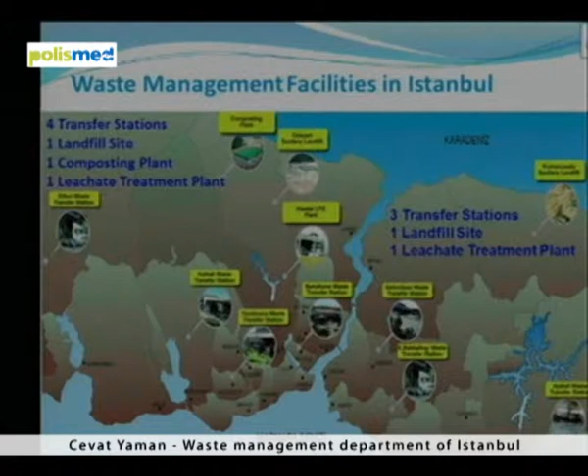And since the topic of my presentation is waste management, there is 14,500 tons of waste per day produced in Istanbul. In the slide, you see the locations of waste management facilities in Istanbul. There are two landfills. One is in the European side, and the other one is in the Asian side. And there are two leachate treatment plants along with these landfills. And we have also one composting plant on the European side. And we have 7 transfer stations, which bring the waste from the towns to the transfer stations and from the transfer stations to the landfill sites.

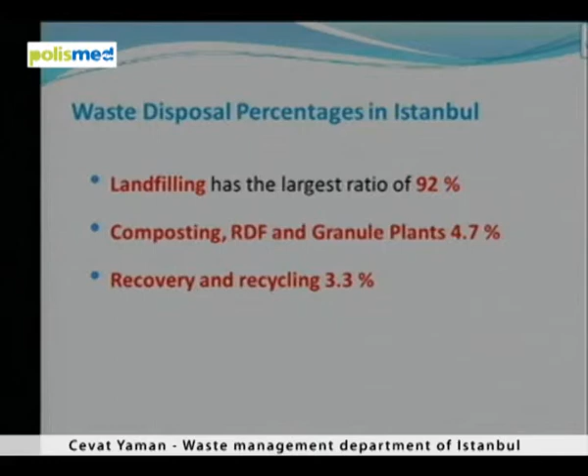So what do we do with this huge amount of waste? 92% of the waste produced in Istanbul goes to the landfill. 4.7% goes to composting, RDF and granule plants, and 3.3% goes to recovery and recycling. So when we look at the composition of the waste in Istanbul, we see that more than half of the waste is organic, which is coming from the kitchen. So we call this organic waste, and this has a high potential of energy production. And the second high amount of waste is paper and cardboard, then plastic bags and the nappies.

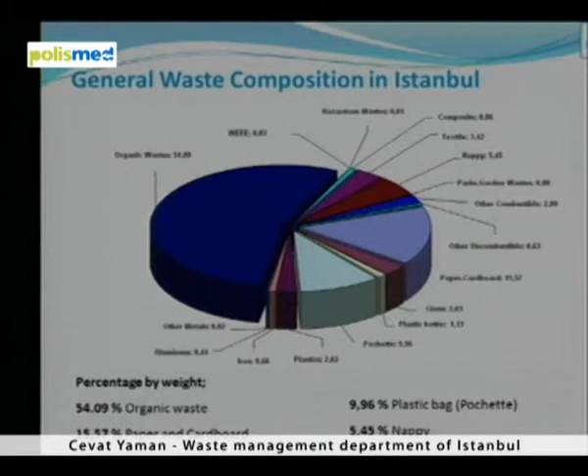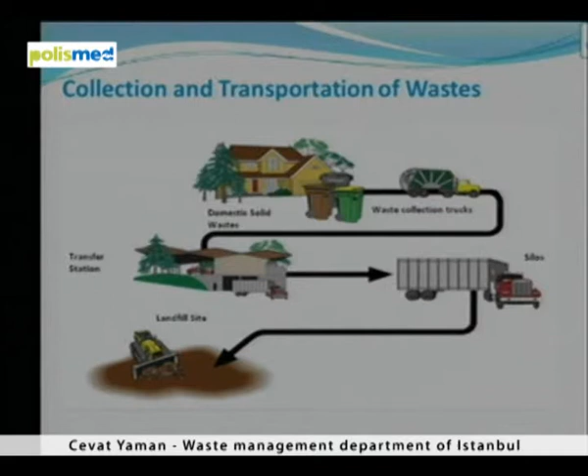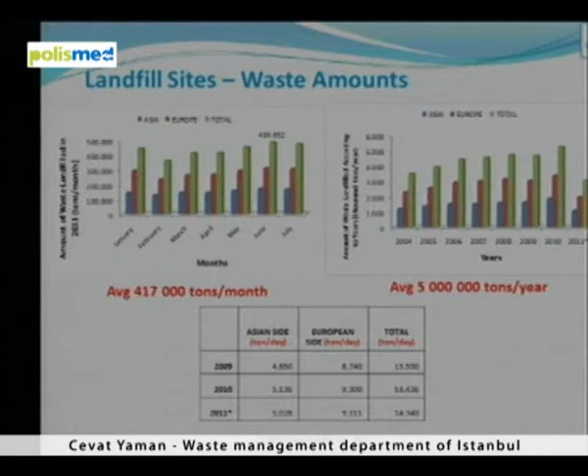So how do we collect and transport the waste? As I said before, the waste is collected from the streets by small trucks and brought to these 7 transfer stations. And from these transfer stations, the waste is brought to 2 landfill sites by larger trucks. So 14,500 tons of solid waste produced in Istanbul every day requires 1,900 runs to 7 transfer stations by small trucks and 500 runs from the transfer stations to the landfill sites by larger trucks. So how do we dispose of this waste collected? 10,000 tons of waste produced in one day is landfilled in the European side landfill, and the other 4,500 tons of waste is landfilled on the Asian side. So when we look at the numbers, every month in Istanbul, we produce 417,000 tons of waste, and on a yearly basis, it's almost 5 million tons every year.

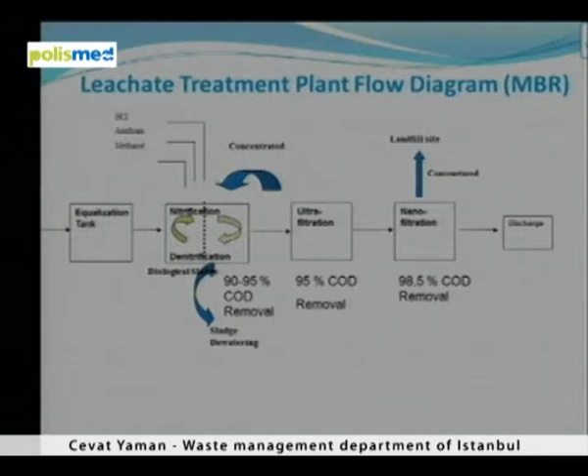So whenever we have a landfill, we have a problem of wastewater or leachate. So we have 2 leachate treatment plants with the landfills, and the way we treat the leachate is called MBR, membrane bioreactor. First we have nitrification and denitrification to remove the nitrogenous products. Then we have ultrafiltration and nanofiltration to remove the colloidal materials. So with this leachate treatment plant, we have over 98% COD, chemical oxygen demand, removal. So when we look at the quality of the water treated at these plants, we have almost clean water after the nanofiltration outlet.

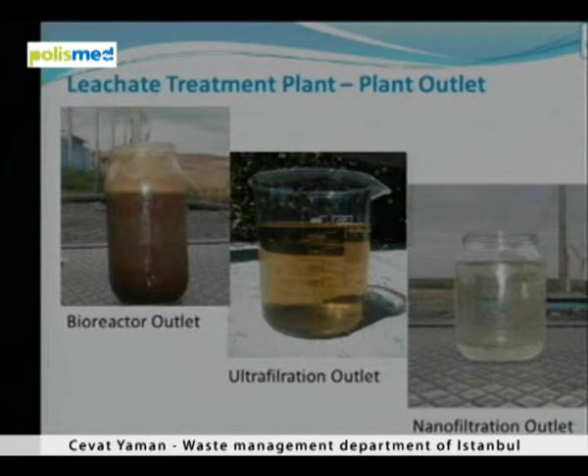Since the organic portion of our waste is high, we established 2 landfill gas waste to energy plants in Istanbul with 24 megawatts installed capacity. Just to give you some numbers, in 2010, we produced 115 million kilowatt hours of energy in Istanbul from these two LFG plants. And this amount equals almost 6 million euros in 1 year. That is how much energy we produced from waste in Istanbul in 2010.

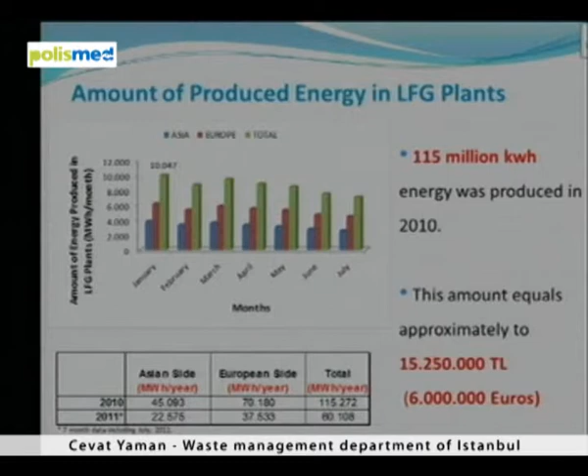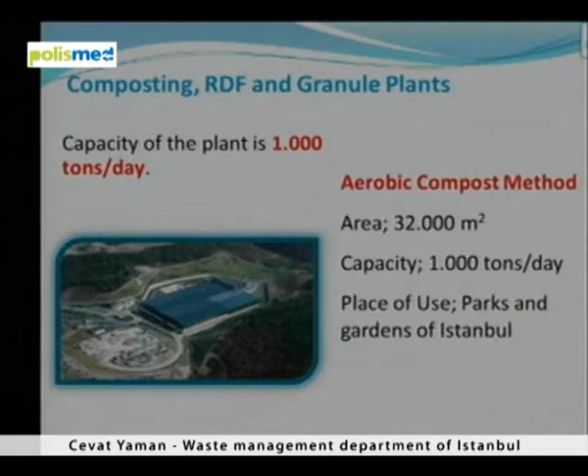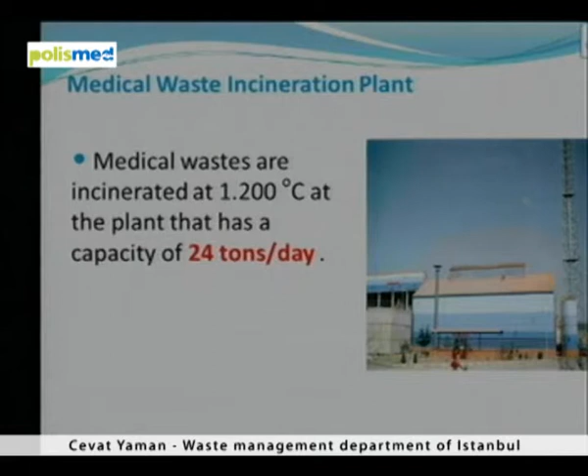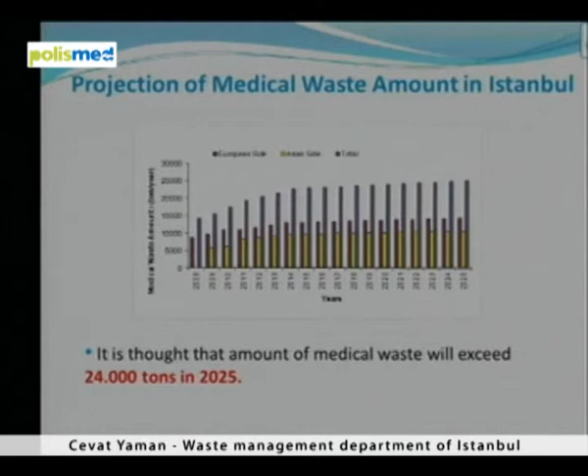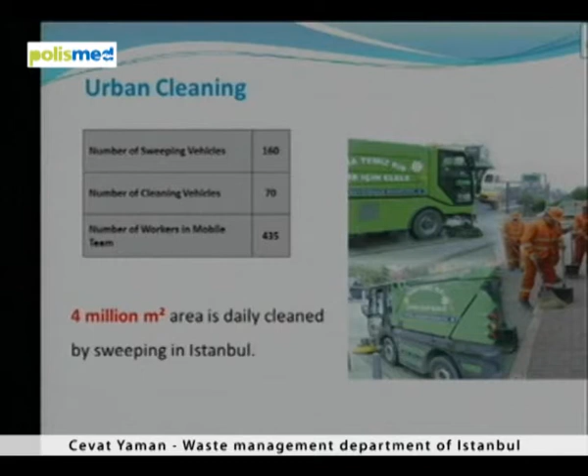We also have a medical waste incineration plant in Istanbul with a capacity of 24 tons per day, and the plant works at 1200 degrees Celsius. These are some numbers about the medical waste we produce. In 1 year, we produce around 17,300 tons of medical waste. And the daily amount of medical waste produced is around 50 tons per day. So when we look to the future, in 2025, we will have almost 24,000 tons of medical waste produced in 1 year. We also deal with a great amount of cleaning in Istanbul. Every day, 4 million square meters of area is cleaned and swept by these trucks.

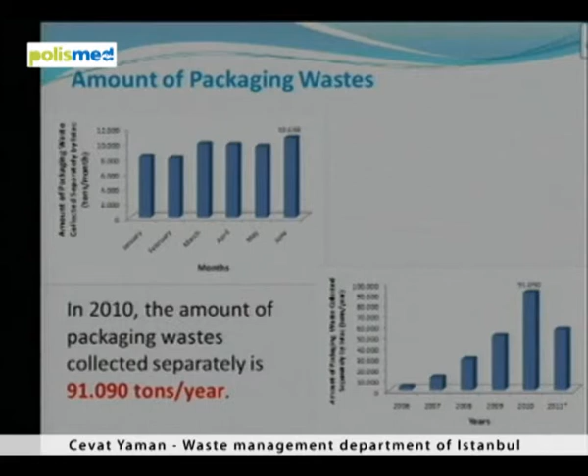And I would like to give you some numbers about the collection and recycling of packaging waste. I should mention that we are not at the point where we are supposed to be about recycling packaging waste, but every year we collect and recycle around 90,000 tons of packaging waste.

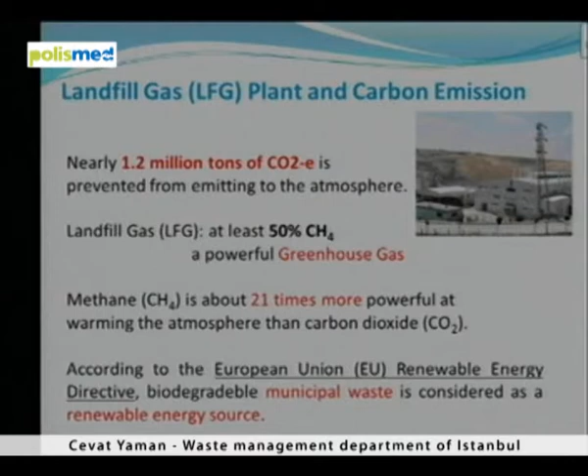So now I will talk about the effects of waste management on carbon emissions in Istanbul. By having these two landfill gas waste to energy plants, in 1 year nearly 1.2 million tons of carbon dioxide is prevented from emitting to the atmosphere. As you may all know, landfill gas is mainly composed of methane gas, and methane is about 21 times more powerful at warming the atmosphere than carbon dioxide itself. And according to the European Union Renewable Energy Directive, biodegradable municipal waste is considered a renewable energy source.

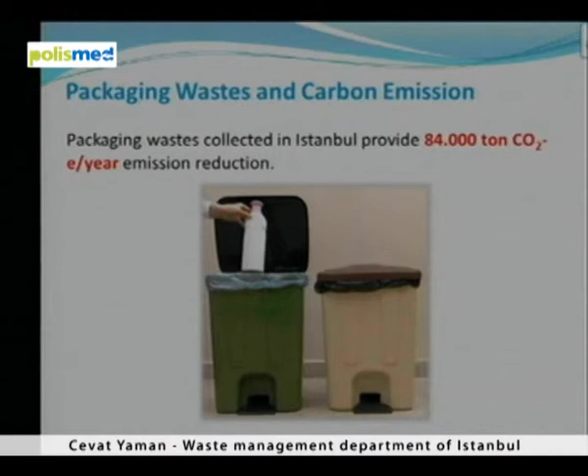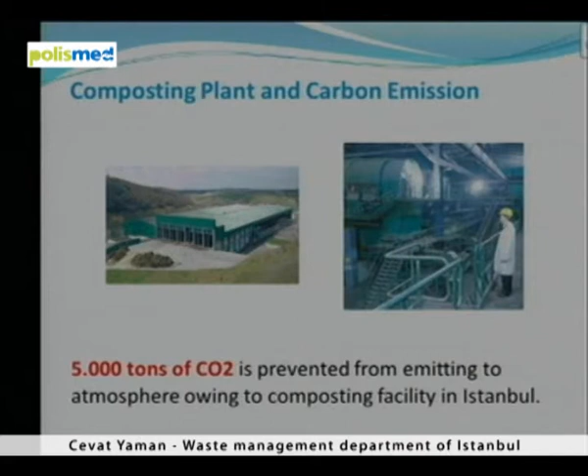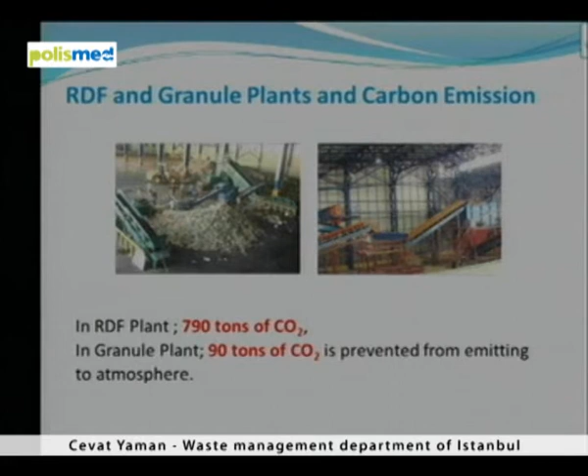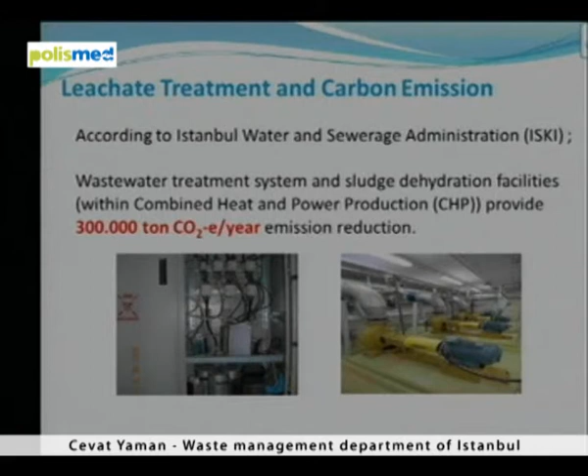Packaging waste collected in Istanbul provides 84,000 tons of carbon dioxide emission reduction, and transfer stations provide 5,000 tons of carbon dioxide per year emission reduction owing to the lower traffic load in the city of Istanbul. The composting plant provides 5,000 tons of carbon dioxide emission reduction. In the RDF plant, 790 tons of carbon dioxide, and in the granule plant, 90 tons of carbon dioxide is prevented from emitting to the atmosphere. And by having these two leachate treatment plants, it provides 300,000 tons of carbon dioxide emission reduction every year.